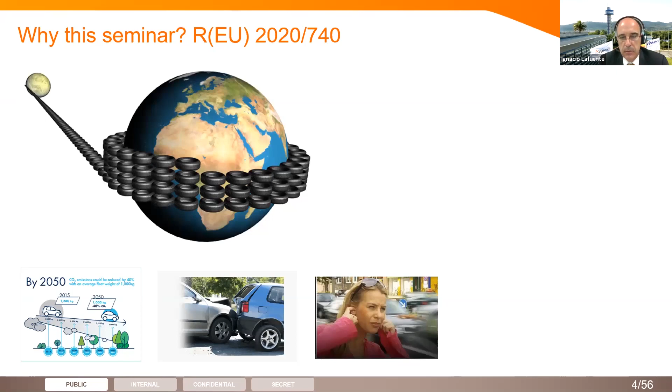Why this seminar? It's obvious that, all over the world, we produce more than 1 billion tires per year, probably near 2, and out of them, several hundred million go to the European Union. Tires have a significant impact on CO2 reduction, emissions, active safety, so avoiding accidents, as well as acoustic comfort of the citizens.

This is the reason why in the past, the European Union decided to add some regulation to the existing approval, and we established the initial tire labeling that later on, after 10 years experience, will be replaced by the new one, which is the matter of today's seminar.

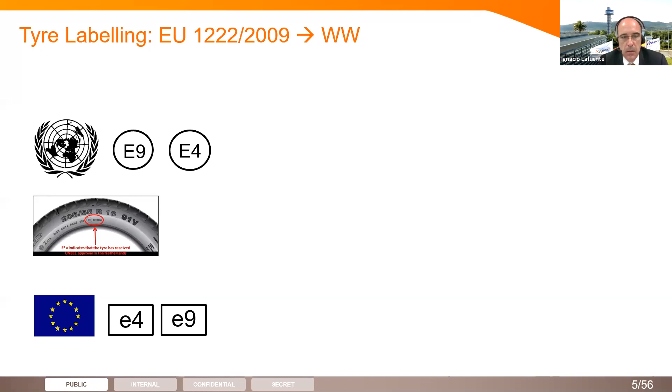Why a label? First of all, you remember that tyres were evaluated according to the homologation regulations during many years, but this has revealed to be not sufficient for consumers to make an informed purchase. Then the European Union decided to establish some kind of information to the end consumer so that when one person decides to replace the tires in the car, they have a little more information than the pure approval mark.

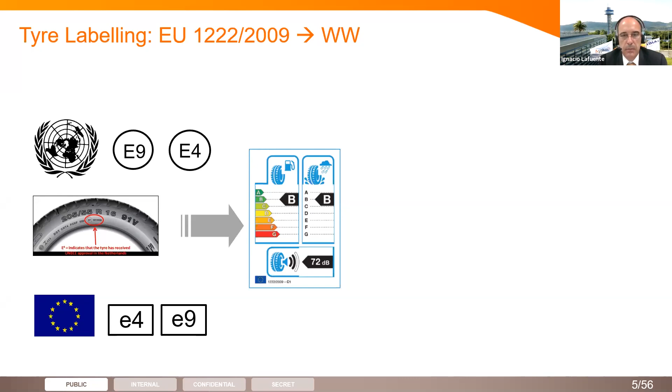This is the reason for the 1222 regulation in 2009 that has been a great success in Europe and as well has been the model for many other labeling schemes worldwide, Europe, Asia, America, etc.

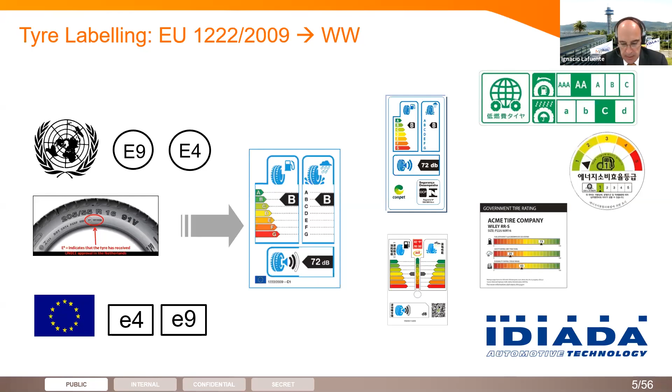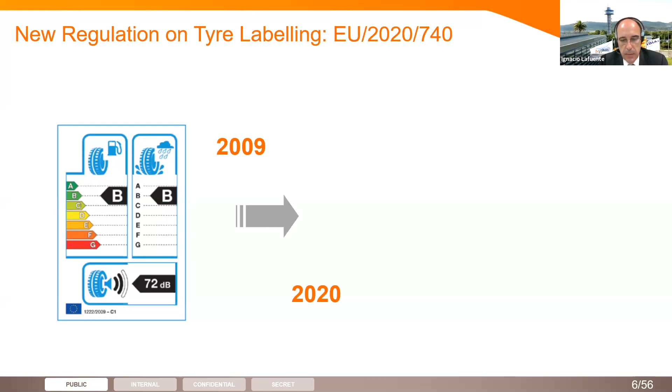Why this new regulation? After 10 years experience, we have seen the big benefits provided by the label. 10 years ago, we saw in the markets very bad labels in FGs, etc., as well as very high noise levels. As of today, the label has achieved important success by eliminating the worst segment of tires from the replacement market. Therefore, in the European Union, we see a clear benefit of that.

After those 10 years experience, we have seen that the label can be improved. And in this seminar, we will see the differences between the future label as of next year and the existing label today.

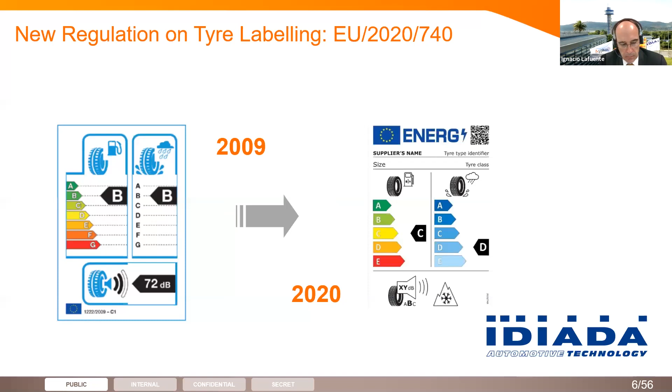Why do we organize this seminar? Who is IDIADA? IDIADA is a company providing engineering services to the automotive industry. First of all, we provide services of testing, development, engineering, and simulation.

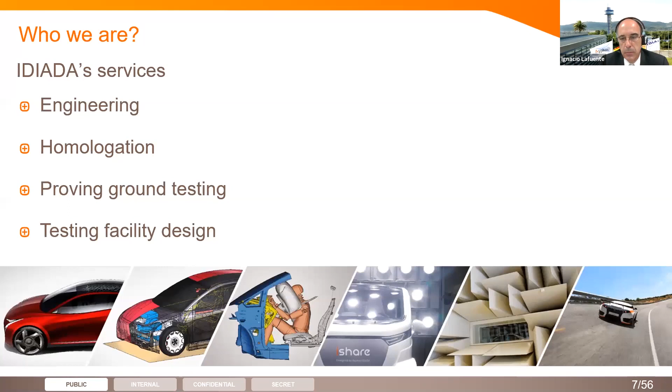But our homologation division, to whom we all belong, is a recognized technical service with full competencies in all the approval regulations, directives, and many non-European standards. As well, we have a complex of proving grounds, the main one at headquarters in Barcelona, as well as a newly opened proving ground complex in China.

IDIADA today is a multinational company with presence in more than 25 countries, with significant presence in European countries and Asian countries, as well as our American delegations. Today's seminar is foreseen for Europe and Asia, but it will be followed by another one at a timetable compatible with American attendees.

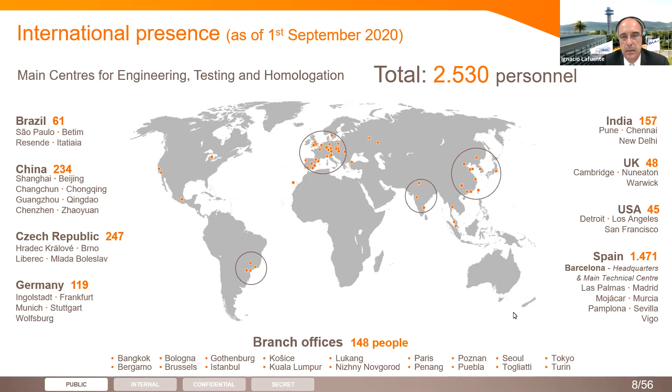What is the homologation division? First of all, the homologation division is the unit responsible in IDIADA for fulfilling regulatory requirements. We work for different approval authorities, for instance the Spanish government, as well as many other European or non-European authorities, helping manufacturers to prove their legal compliance.

Our work is based on UN regulations as well as European Union directives or regulations, but also based on national regulations when applicable. So we provide safety and security by signing approval certificates with good results, and with our approval certificates or reports, our clients, vehicle or component manufacturers, can get the necessary approval to sell the vehicles.

Our mission: to help manufacturers in their marketing activities so that with our documents, any kind of vehicle category or component can access any market worldwide, not only the European market, but any other, using our certificates.

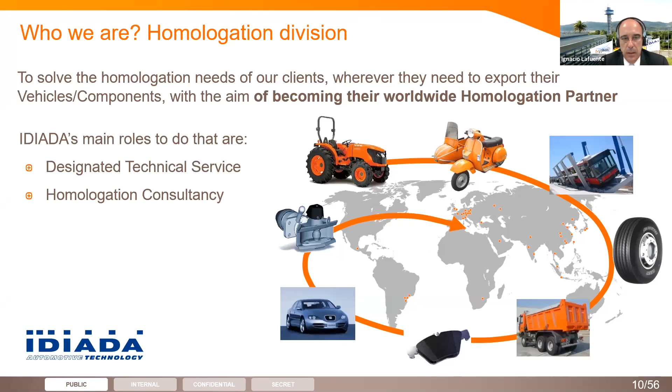Homologation division has an impressive network of international relations with different approval authorities, not only in Europe, so that we can help manufacturers in their activity marketing products in North America, South America, Asia, even African countries.

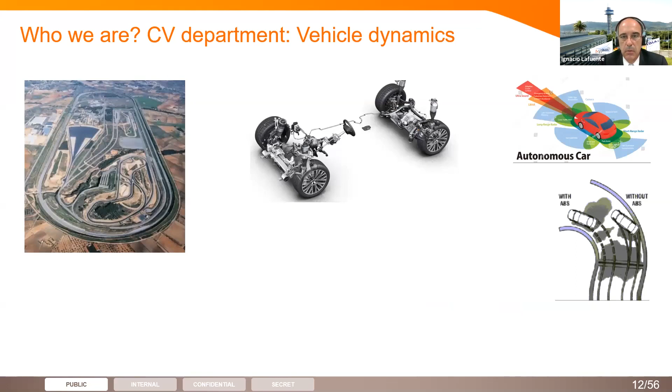In particular, this department, the commercial vehicle department, together with vehicle dynamics, is responsible for anything which is moving a car in the proving ground. So brakes, ABS, automated driving, stability control, as well as replacement parts or brake efficiency are our main responsibilities.

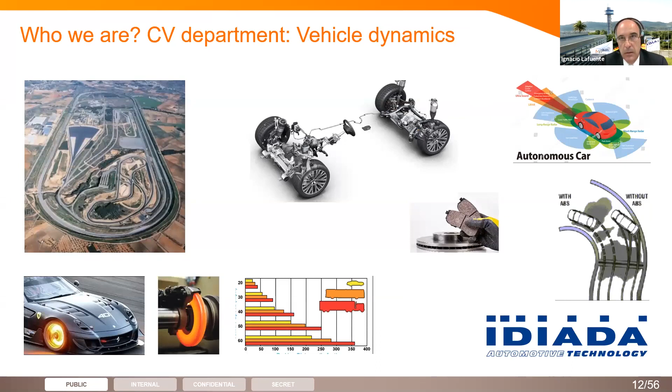Within this, tire testing and certification is a very important activity, and we are proud to be one of the few technical services having full capacity for tire homologation and tire labeling testing, because we have all the necessary facilities: ISO surface for noise, rolling resistance facilities, as well as impressive wet grip testing facilities for any kind of vehicle category, all together in our headquarters in Barcelona, as well as in the proving ground we have in China.

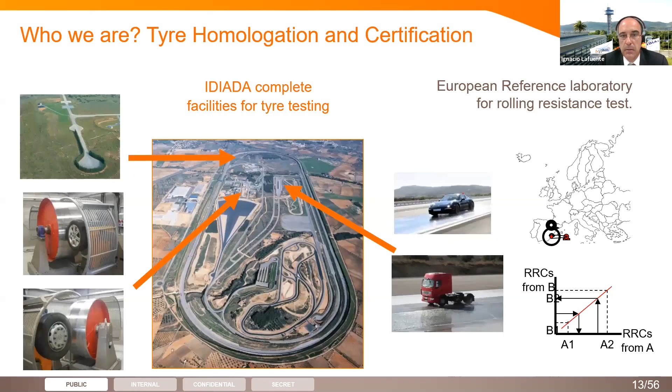We have these capabilities, and this, together with the fact of being one of the European reference laboratories for rolling resistance laboratory alignment. So this is an example of our capabilities.

Of course, you know that Spain is a warm country. We don't have snow. Therefore, for the snow testing, we have the nice cooperation of our friends in Finland as well, present here — one greeting for them. But indeed, IDIADA is able to perform all the necessary tests and provide all the possible services related to tire testing, including those like regulatory development or market control tests.

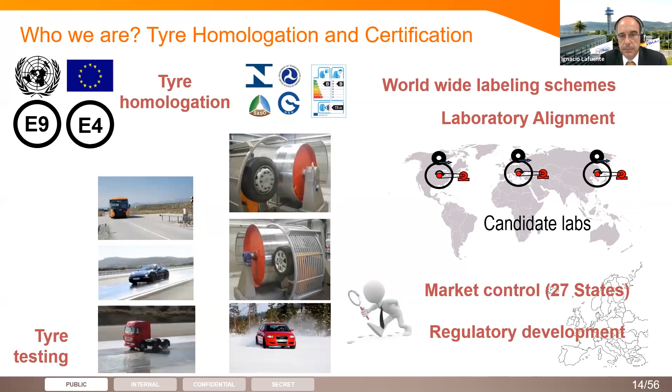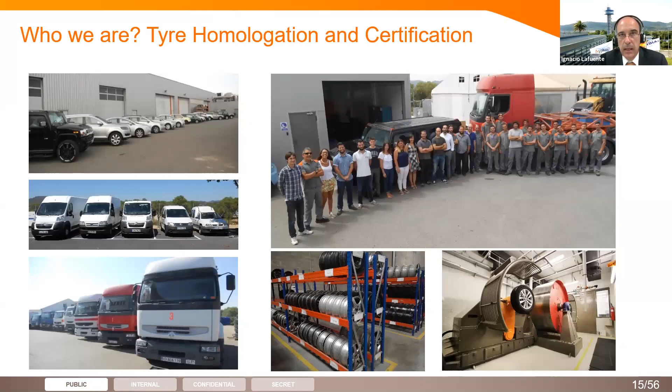To reach this target, we have created a strong structure of professional skilled teams. Probably the picture does not reflect the whole team, which is made out of more than 40 people, as well as an impressive fleet of testing cars and testing rims and wheels that allow us to test for approval or certification any tire dimension you can imagine in your catalog.

Out of those experts, please let me introduce the speakers that will present the whole seminar. First of all, Mr. Ricard Anadon, engineer, senior manager for tire testing and certification, as well as homologation. He is a member of the UNECE GRBP, the working group where tire regulations are developed, as well as a member of the European Commission expert group on laboratory alignment, EGLA.

Then we have Carmelo Cruz, senior engineer responsible for outdoor testing. He will explain anything related to wet grip testing and requirements.

Oscar Comajuan, senior engineer, is responsible for indoor testing, and he is also a member of expert group EGLA in laboratory alignment for rolling resistance. He will explain anything related to rolling resistance and laboratory alignment.

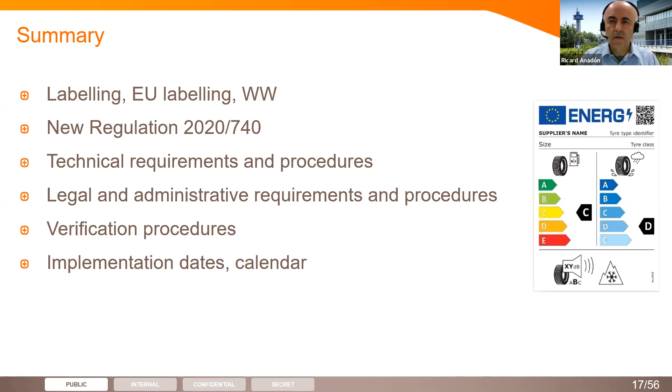As most of you probably know, the main requirements are performance parameters: rolling resistance, together with laboratory alignment — we will talk about this later — the wet grip performance of the tire, and the external rolling noise.

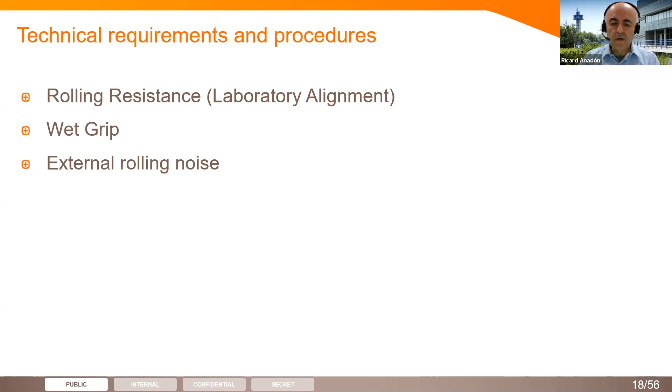Before continuing this presentation, I would like to say that IDIADA has a strong commitment to provide the best possible testing conditions to meet these requirements for the tire industry, in particular in terms of state-of-the-art proving ground, testing equipment, expertise, and even the optimum climate conditions we have in Spain.

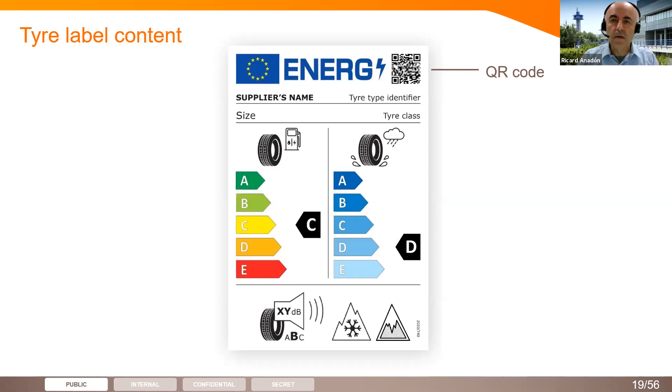Having said that, let's check carefully the label, the new label we have in this new regulation. As you can see, we will start on the top right corner. We have a quick response code, which will be linked to the European database. We will see this later.

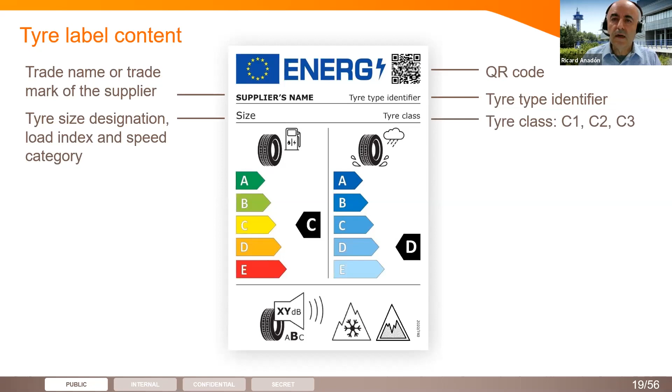On the left-hand side, we have the trade name or trademark of the supplier. On the right-hand side, we have a tire type identifier or commercial name of the tire. On the left-hand side, we have the tire size designation, including the load index and speed category. On the right-hand side, we have the tire class, whether it is a C1 passenger car tire, C2 light truck tire, or C3 truck and bus tire.

In the middle of the label, we have on the left-hand side the fuel efficiency performance class, organized from A to E. On the right-hand side, we have the wet grip performance class, also organized from A to E. And at the bottom, we have the external rolling noise class, including the sound emission value.

On the right-hand side, we have two new pictograms. One is the well-known alpine symbol, or three-peak mountain snowflake, if the tire is designed for snow, or the other new pictogram if the tire is designed for ice.

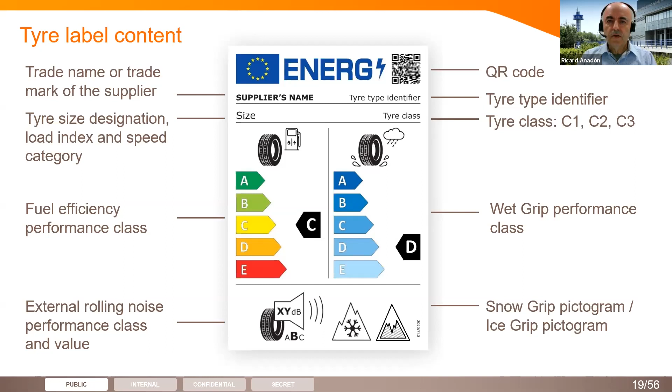Regarding the dimensions, these are exactly the same as the previous label. The overall dimension is 75 millimeters by 110 millimeters. All the details you will find in Annex 2.

And on the bottom, we have four options. The minimum information is the sound emission, sound level class, and the emission value. It could also be added the alpine symbol if the tire is for snow. Another option is if the tire is for ice, it could be this new pictogram, or both. Those are the four options on the bottom area of the label.

As Ignacio and Ricard introduced earlier, one of the tests performed in order to homologate and label tires is the rolling resistance test. Tire rolling resistance is a force caused by the constant tire deformation when rolling on the asphalt, which resists the motion of the vehicle, causing a direct loss of energy. This loss of energy is directly related to fuel consumption and CO2 emissions. The homologation and labeling regulations limit these energy consumptions on the tire, and they are checked through a rolling resistance test.

This test is based on ISO 28580, in which a tire is mounted on a test bench, like you see in this video, and pressed against a drum at a certain load, usually 80 or 85% of the load index of the tire, depending on the tire class, and run at 80 kilometers per hour.

There are four different methods of measuring these forces. The torque method, in which the torque in Newton meters applied by the electrical motor to the drum is measured. The force method, in which the force in the tire axle is directly measured. The power method, very similar to the torque method, but instead of measuring motor torque, we measure the electrical power in watts. And the deceleration method, in which the rolling resistance is calculated through the deceleration time, taking into account the moments of inertia on the drum and the tire and wheel assembly.

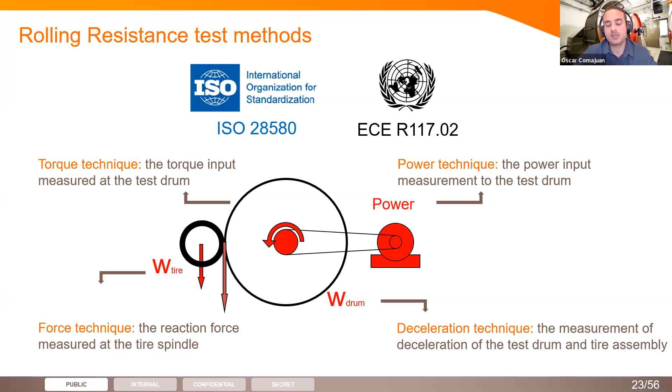The result obtained is a coefficient given in the dimensionless units of Newton per kilonewton, or the equivalent kilogram per ton.

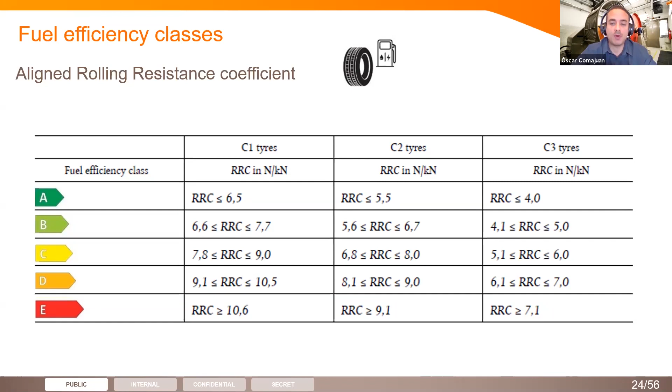The most important matter to remember is that these rolling resistance values are aligned values. So these are to be measured by a European reference machine or an aligned candidate machine, which has been correlated to a reference machine, which I will explain later in this presentation.

If we make a comparison between this table and the previous one shown in the previous regulation 1222 of 2009, we can see some differences. Basically, the table has been compressed, and for all tyre classes, values from A to C remain pretty much the same as in the previous regulation, whilst the maximum values now go up to E label instead of G, filling in the rows that were empty in the previous regulation, like D class for C1 and C2, and G class for C3. Also, maximum values have been modified.

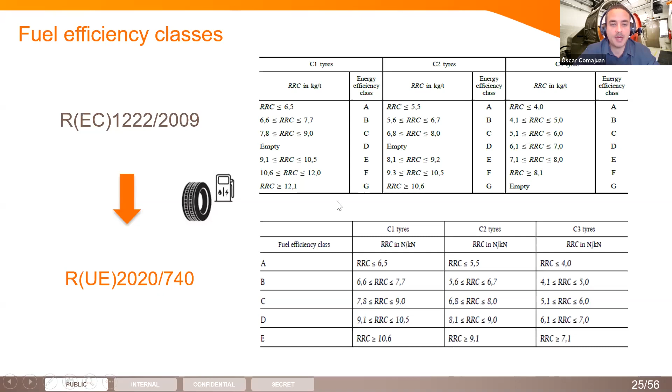As I was explaining before, these aligned values are according to the labeling regulation and can only be given in one of the reference machines of the European reference grid, or a candidate machine aligned to a reference one.

For those of you who are not familiar with these terms, I would like to explain why we need an alignment procedure. Basically, every machine has different components, and as I said earlier, they apply different methods of measuring this rolling resistance coefficient, like force, torque, power, or deceleration. That means that in the end, the results obtained may slightly vary between one machine and another.

So a way of making a machine give the same results as another machine is by performing an alignment between those two machines.

So what is an alignment? An alignment procedure between two machines consists of testing some samples in each machine under the same exact testing conditions, first in one machine and then in the other. Then both results are compared and a correlation formula between those two machines is calculated. This correlation formula, also known as an alignment equation, is applied to the result of the candidate machine, and then the result is corrected as if it had been tested in the reference machine.

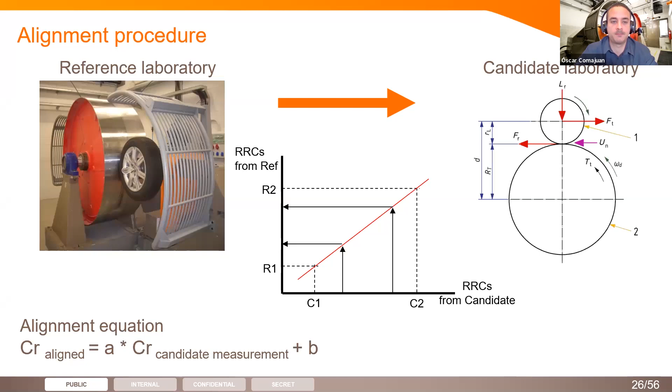This European alignment procedure was firstly introduced in Regulation 1235 of 2011, which was an amendment of European Regulation 1222 of 2009. The conditions to perform this alignment were set in Annex 4A of the 1235 of 2011, and now these conditions have been slightly modified and introduced in the new Annex 5 of the new regulation.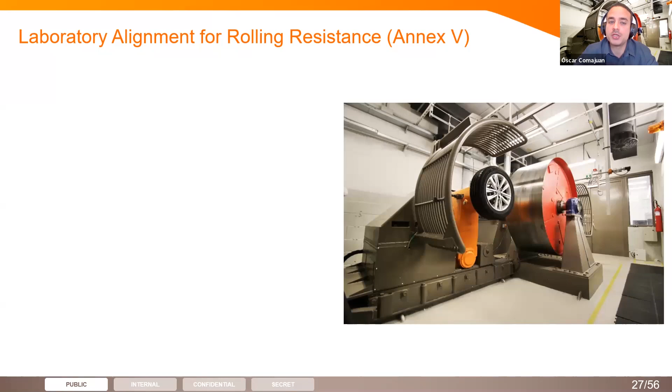The European alignment consists of a series of tests on at least 5 different tires, which shall be selected fulfilling certain requirements. There shall be a gap between the highest and lowest RRC values of 3 Newton per kilonewton in C1 and C2 tires, and a gap of at least 2 Newton per kilonewton in C3 tires. All these steps of rolling resistance coefficient between each tire shall be distributed evenly through the alignment set of tires selected, and the load index of the tires shall cover the range of tires to be tested in that particular machine.

In the previous regulation, there were also requirements on the maximum width and diameter of the tires, but now that has been deleted.

As requirements for the candidate machines or candidate laboratory, the standard deviation shall remain lower than 0.075 Newton per kilonewton for C1 and C2 tires and 0.06 Newton per kilonewton for C3 tires. Finally, the R2 correlation between the candidate and the reference machine, which basically represents how accurate the alignment formula is between both machines, shall be equal or higher than 0.97.

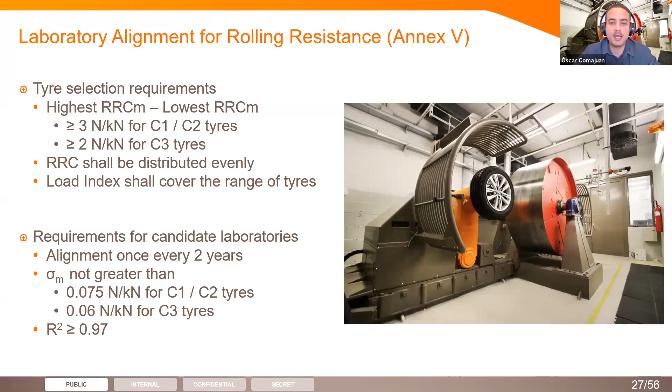Now I will give the floor to my colleague Carmelo, who will speak about the wet grip test.

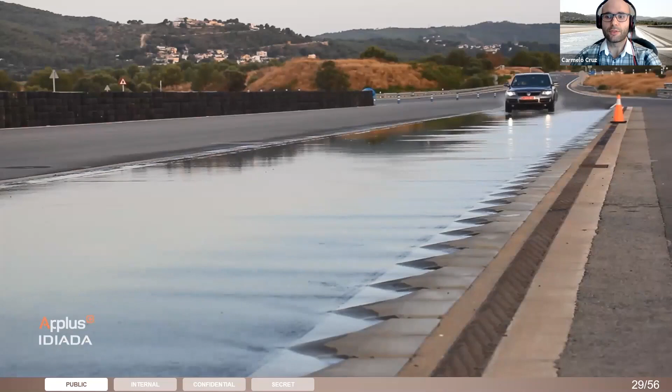The new Regulation 2020-740 does not include the test procedure as the old labeling did. Now it refers to the procedures of UN Regulation 117, so it will always be updated to its latest version. The test, as you can see now, consists of several brakings from 80 to 20 kilometers per hour. This test can be done using the vehicle or trailer procedure, which are completely equivalent.

The new wet grip method for car tires has been developed to improve repeatability and reproducibility. Some new parameters used in the final calculation are new. First, the test pressure now depends on the wheel load. Then, the texture depth is a correction factor in the final calculation. And the temperature ranges have changed and are more in line with the tire category, depending on whether they are normal, snow, or snow severe conditions tires.

For commercial vehicle tests, as you can see now in the video, the same procedure is used as in the old regulation. It stays the same. This procedure is shared for van, truck, and bus tires. It consists of several brakings from 60 to 20 kilometers per hour. Remember that car tires brake from 80, not 60. This procedure is also done with vehicle or trailer.

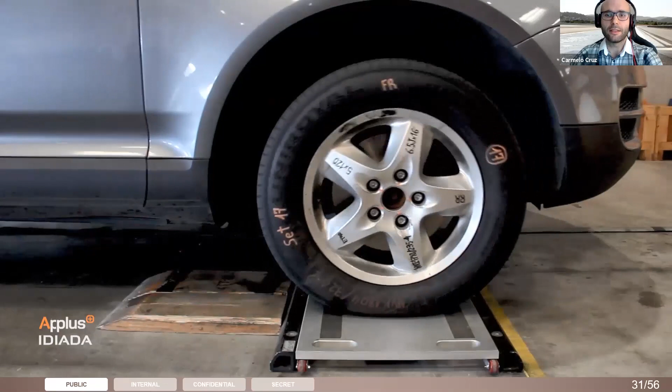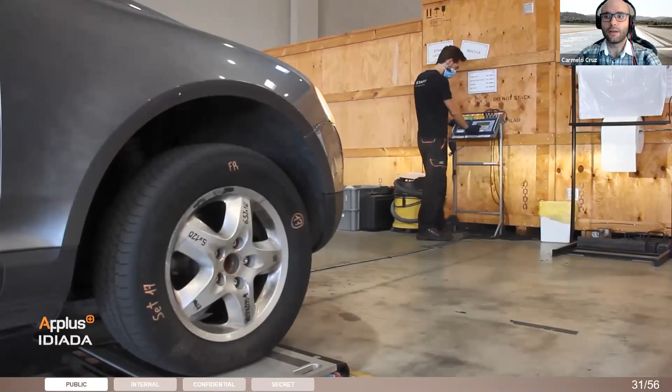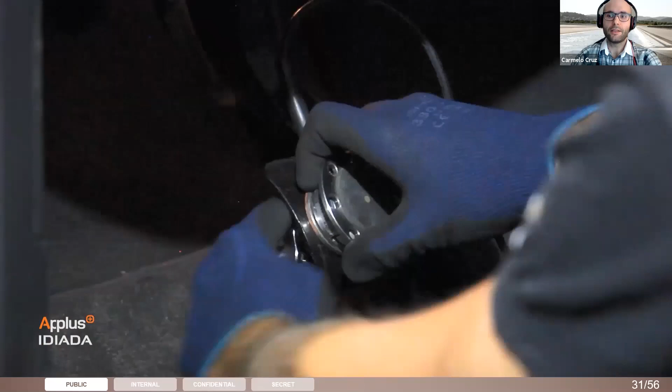Now in this video, you can see all the equipment used to perform a wet grip test. All these devices must be calibrated to ensure good traceability. The usage of a weight scale with 4 platforms is better for doing an online loading of the vehicle and seeing how the mass transfers from one axle to the other. Automatic test sheets are used also, and special pedals to measure the force applied, and also some human-shaped dummies to load the vehicle using water.

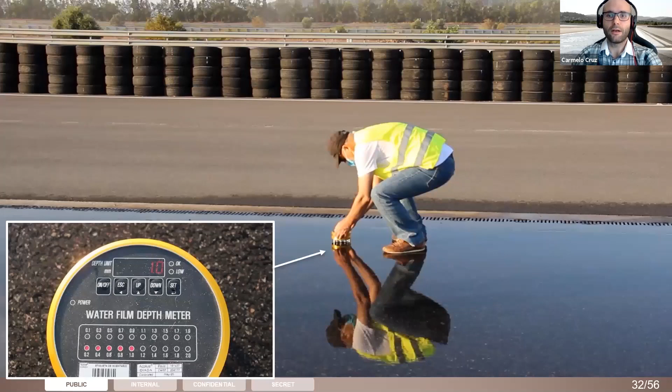The proving ground is maintained and measured by a specific department, but we have portable devices to do some checks also. You can see now the device to measure the water depth at the test location. The water depth is one of the most important parameters to control through the test. It's important to keep a constant film of water during the whole length of the track to provide repeatable results.

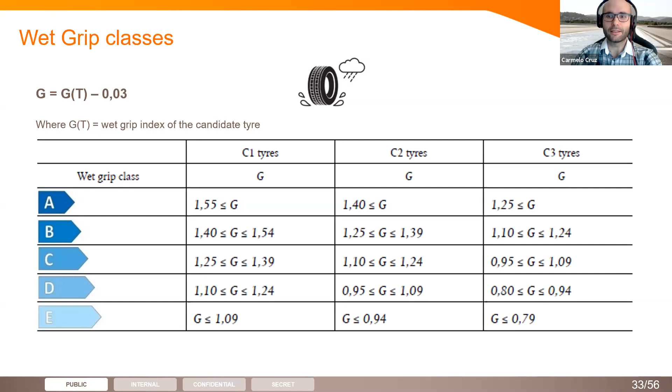This is the new classification for the wet grip grades. The top grades, from A to C, have not been modified. There were rumors about making it more difficult to get an A level, or about adding new grades like A+, but finally that was discarded. In fact, my company is sad about not having the A+ grade. The letter D is no longer empty, and grades F and G have been deleted from the chart.

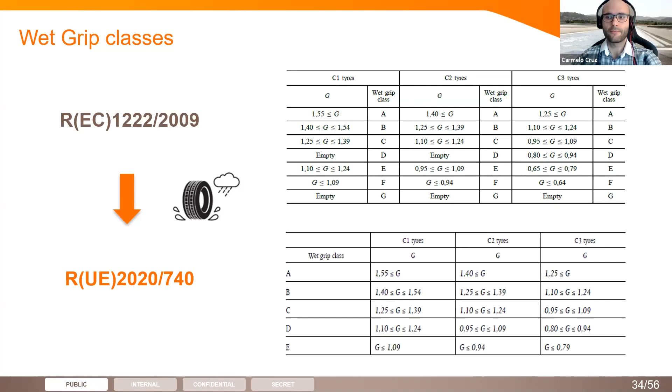Now it's clearer and simpler to identify which is the correct grade for a given test result. And after having explained this, I'll give the floor to my colleague Nuria, and she will explain the noise test.

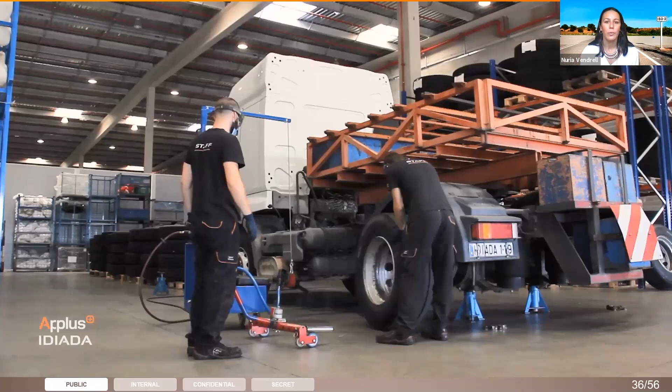First of all, we want to show you how we prepare and perform the test, just to provide you with some background before the specific technical information.

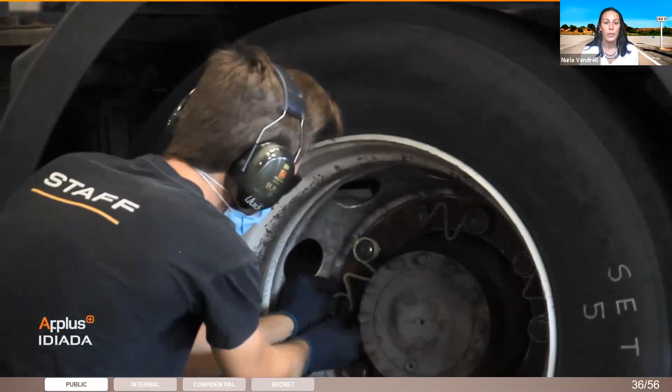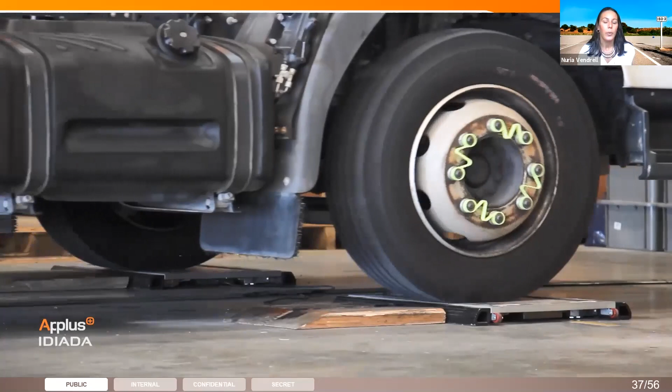As Ignacio said at the beginning, the noise test is an outdoor test. So the first thing we need to do is prepare the vehicles and fit the tires with their correct rims. In order to perform the test according to the regulation, following the tire size we're going to test, we also have to load the vehicles and set the pressures according to this load.

Once the vehicle is prepared and the tires are running, we are ready to perform the test on our ISO test track. This test surface must comply with the ISO 10844-2014 requirements, which is much more restrictive than the previous one. And two of the most important parameters of this surface are the absorption and the texture.

To perform the test, the vehicle has to pass between the two sound level meters with the engine off, at different speeds equally spaced under and over the range. For C3 tires, the average speed is 70 kilometers per hour, and for C1, C2 tires, the average speed is 80 kilometers per hour. When the vehicle is right in the middle between the two sound level meters, the noise emitted by the tires is recorded, and after some calculations, we get the final result. And it is with this final result that we can label our tires.

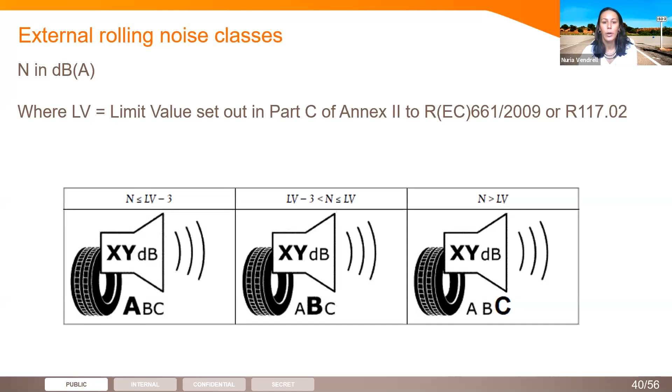Here we can see the new way to label tires regarding noise. Instead of 1 arc, 2 arcs, or 3 arcs, we now have A, B, or C. For example, if your final result is lower than the limit value minus 3, you will have an A. If your final result is between the limit value minus 3 and the limit value, you will have a B. And if your final result is higher than the limit value, you will have a C. The limit value in decibels must also appear on the label.

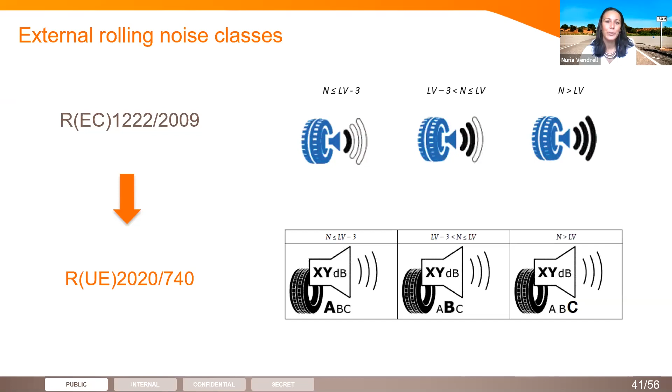Thanks, Nuria. Hello again. The fact is that new market trends are moving toward more common usage of all-season and snow tires. Some countries are forcing their usage during winter, and others are just recommending it. But the truth is that every day more and more snow tires are bought. The problem is that snow tires are not usually as good as normal or summer tires when considering wet grip. This fact made snow tires have a worse label than normal tires in front of the final consumer.

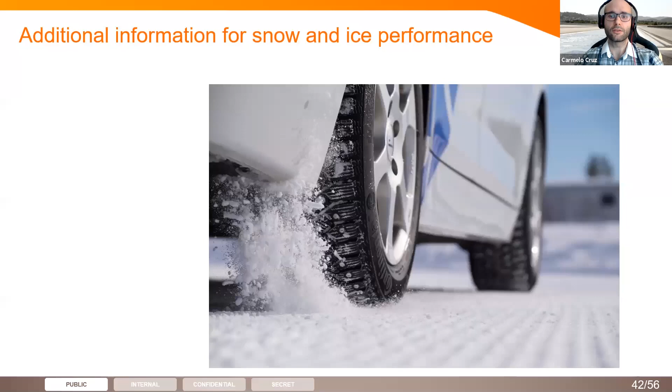The snow grip test is very similar to the wet grip test. For C1 and C2 tires, it's a braking test, very similar to the asphalt wet grip test. For C3 tires, it's an acceleration test. But the principle is the same, whether you brake or accelerate, you are comparing with an SRTT. It's also a comparative test, needing 2 runs to do the average.

Snow tires have blocks set far apart, designed to grab and scratch the snow, so the performance is not as optimized on wet asphalt. So the inclusion of the symbol will allow the final client to choose the correct tire, not only focusing on the wet grip result when thinking about their safety.

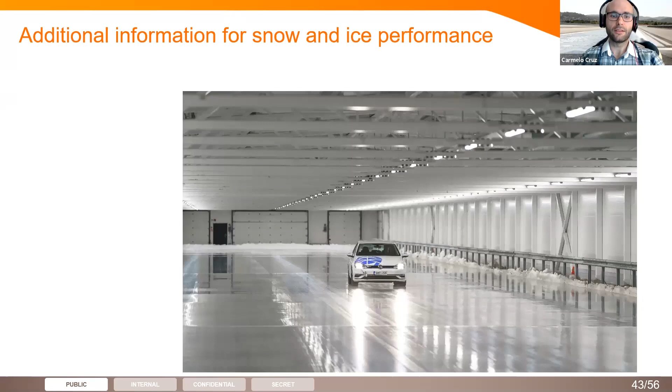This is the very brand new test included in the new regulation. The ice grip test is also based on a braking test. This test comes from the ISO 19447, still in a draft state. It needs 3 runs to do the average.

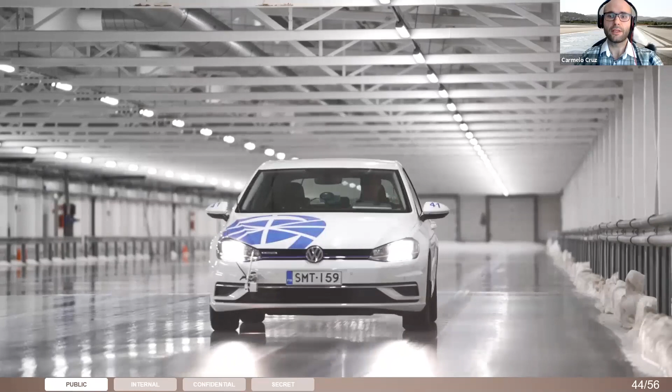Ice tires are not usually good at wet grip, nor at snow, so it's important to show the client the purpose of these tires. They have blocks set very close together, made of a special compound with a mix of silica, staying flexible in very cold temperatures. These tires are perfect to drive not only on icy surfaces, but also on highways during very cold seasons.

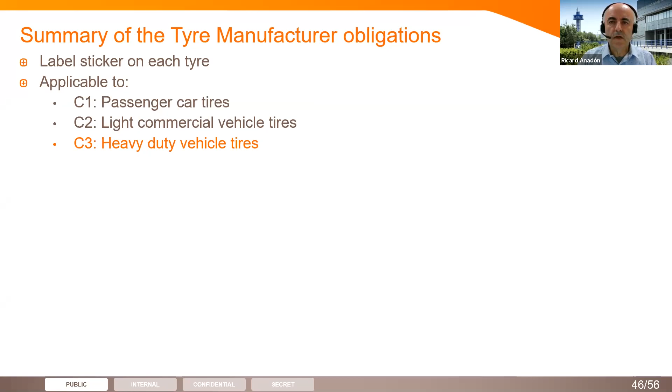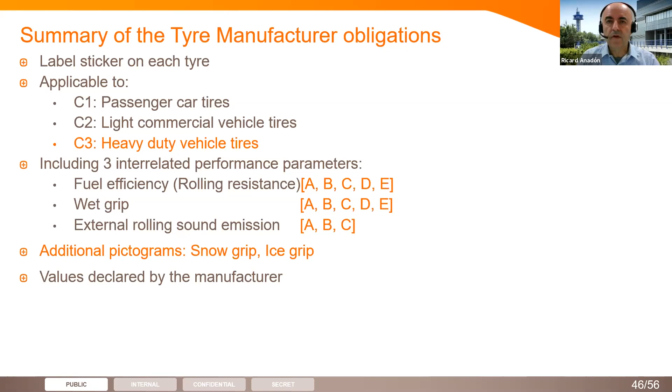Also, as you have seen, this label is including 3 interrelated performance parameters. Fuel efficiency measured by rolling resistance, classes from A to E, wet grip, classes from A to E, and external rolling noise or sound emission, classes from A to C. Additionally, we have 2 new pictograms, whether the tire is designed for snow or for ice. The values are still declared by the manufacturer. Of course, if the test is performed in an independent laboratory, it's adding value, but at the end, the manufacturer is deciding which values should be declared in the label.

A new point, as we have seen, is a quick response code linked to the public database. We will see later. Also, a new point in this regulation is that the label information should be available for vehicles, for OEMs. So in other words, this regulation is not applicable only to aftermarket, but also to original equipment. And it is a vehicle manufacturer responsibility to show information regarding the tire label to the buyer. And finally, the label information should be available on any promotional material and internet, and this information should be close to the price.

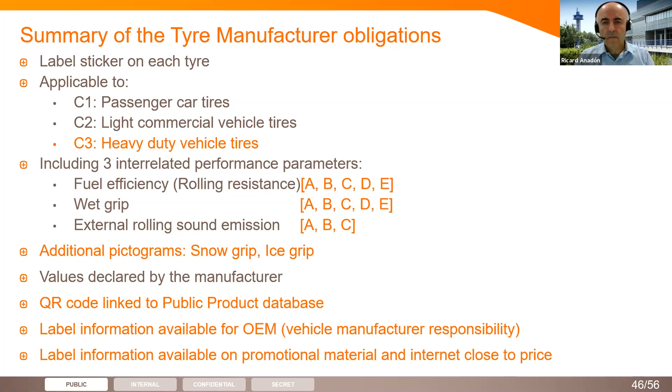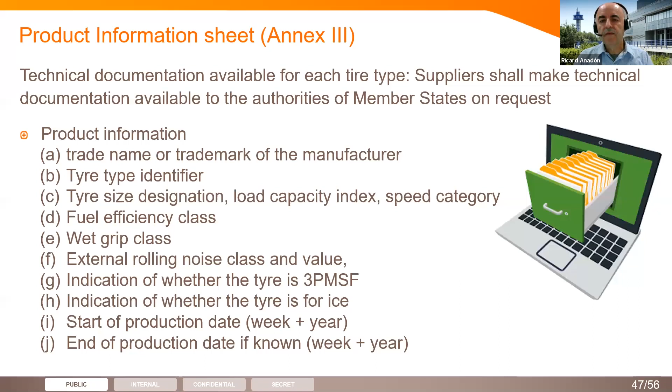Furthermore, there should be a product information sheet available for the authorities. This information sheet is very similar to the information document provided for getting Regulation 117 type approval, for example. And this document should include information such as trade name or trademark of the manufacturer, tire type identifier, tire size designation, including load index and speed category, all the information on the label, fuel efficiency class, wet grip class, external rolling noise class, whether the tire is designed for snow or for ice, the start of production date in a 4-digit format, so week and year, and the end of production date if it is known. Okay.

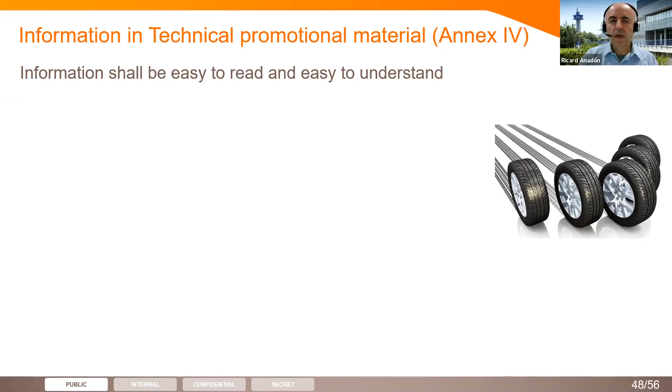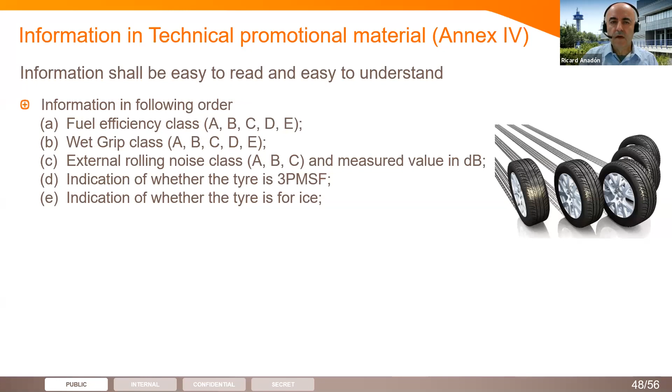Also, the label information will have to be included in any promotional material. First of all, this information shall be easy to read and easy to understand. It should be organized in the following order: fuel efficiency class, wet grip class, external rolling noise class, and indication of whether the tire is for snow or ice. Furthermore, the manufacturer shall also make available information regarding whether the tire belongs to a family, so indication of a range of lowest and highest performance.

A link to the Commission website where the end user can find more information. Clear explanation of the meaning of the pictograms on the label, and some kind of a statement highlighting the importance of the driver behavior, such as fuel saving, tire pressure check, or respect to stopping distance. Okay.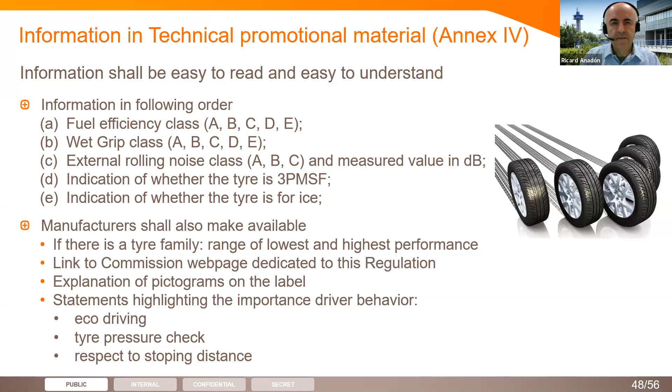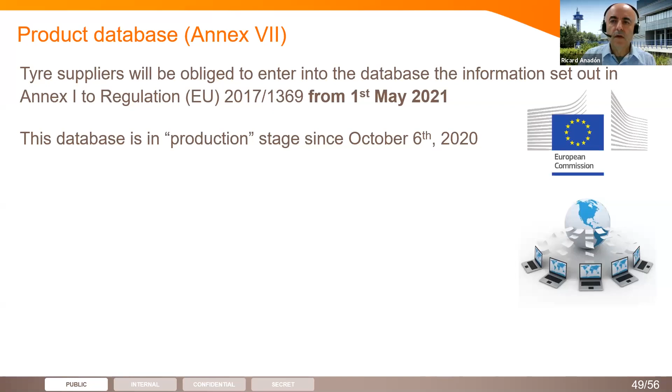Also, another important point is that the tire manufacturer shall introduce information regarding the tire in a European database. This database is already existing in the European Union for many other products, a total of 23 products, and now tires are included in that database. The database is called EPREL, European Product Database for Energy Labeling. And this database, after a phase of development, is now in production stage since October 6th, so last month. Okay, so it's ready to upload information there. There are two parts of it.

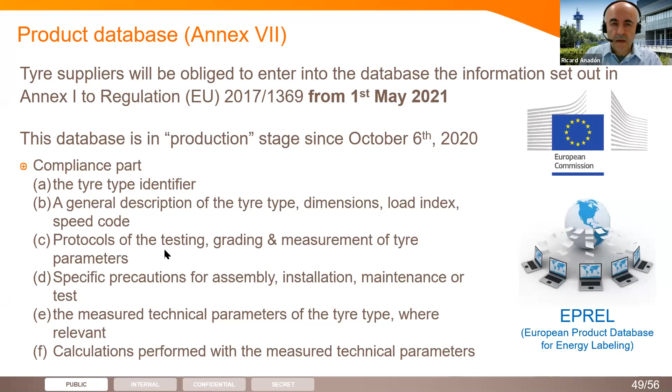One part is called the compliance part and is accessible only to the European Commission and the authorities, market surveillance authorities. And the information there should be the tire type identifier, general description of the tire type, dimensions, load index, the speed code, protocols of the testing, grading and measurement of tire parameters, any specific precaution for assembly, installation, maintenance, or test, measured technical parameters of the tire type where relevant, and calculations performed with the measured technical parameters. Okay.

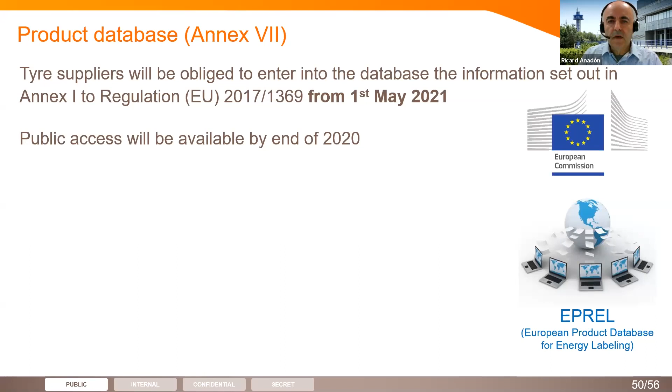Also, there will be a public part of it. So part of this information will be available for all users in the European Union. This public access will be available by end of 2020, so not yet. And information there should be the trade name, trademark, address, contact details, or other legal identification of the supplier, the tire type identifier, the tire label information in electronic format, the classes and other parameters of the label, and the parameters of the product information sheet, the PIS, in electronic format.

So in other words, if you remember, we spoke about the QR code. Anyone with a mobile phone or any portable device will be able to scan this code, and this code will be linked to this part of the public database to have all the information of the tire. Okay.

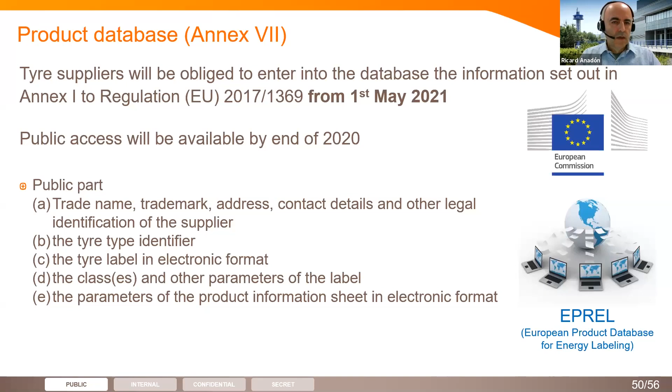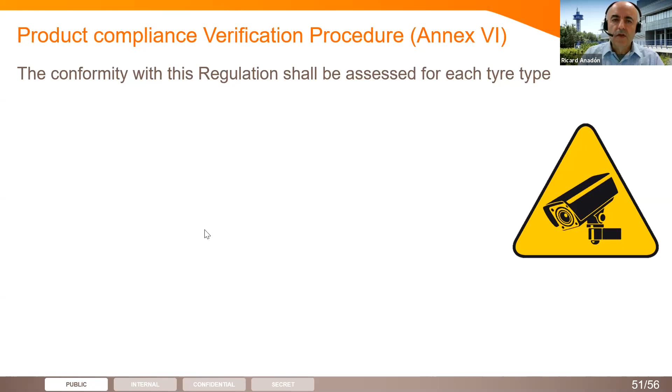Also, another very important point of this regulation, described in Annex 6, is the conformity of this regulation. This regulation is pushing European member states to perform market surveillance activities or market surveillance control. This control is just to make sure that the label is according to the real performance of the tire. Then this table will be used as tolerance to define the conformance.

For example, in terms of rolling resistance, the product will be declared conform if the aligned value is not more than 0.3 N/kN over the upper limit of the declared class. Aligned value, remember. In terms of rolling noise, for example, the measured value shall not be greater than 1 dB from the declared value. In terms of wet grip, the measured value shall not be lower than the lower limit of the declared class.

Similar for snow grip, the snow grip index shall not be lower than the minimum required value in Regulation 117, where this snow performance test method is defined. And regarding ice grip index, it shall not be lower than the minimum value identified in ISO 19447. So if some tires are found non-conformant, then the authorities will contact the manufacturer to start the procedure.

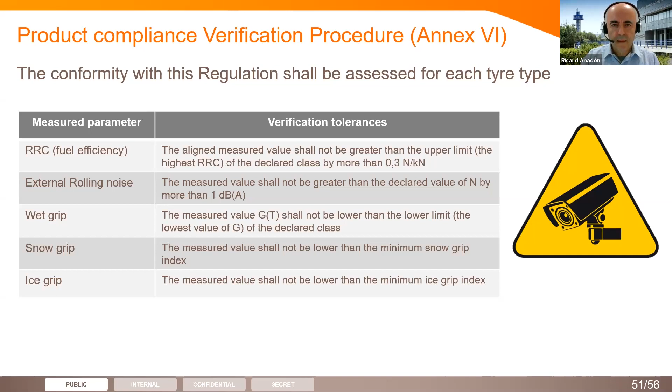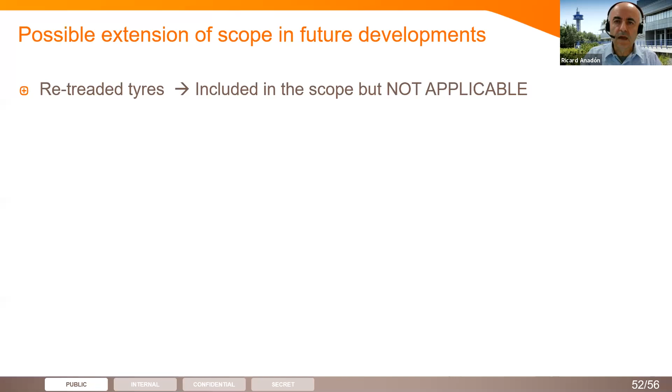Furthermore, this regulation has possible extensions in the future. For example, for retreaded tires. The retreaded tires are included in the scope of this regulation, but the label is not applicable until we have suitable test methods for all performance parameters. Similar to that, mileage information could be included in the future, but is not included yet because there is no test method available in Europe. And similarly, abrasion information is not included, but it could be included in the future if we can define a suitable test method.

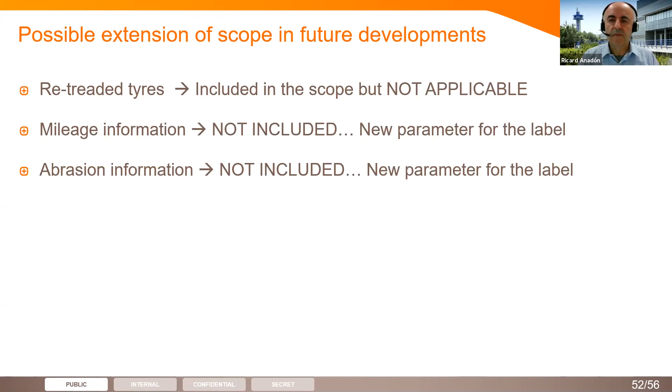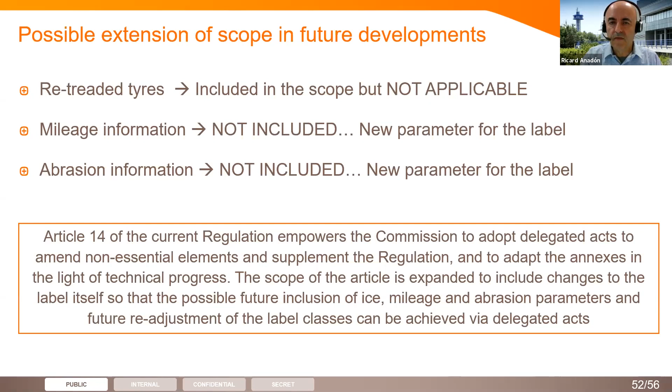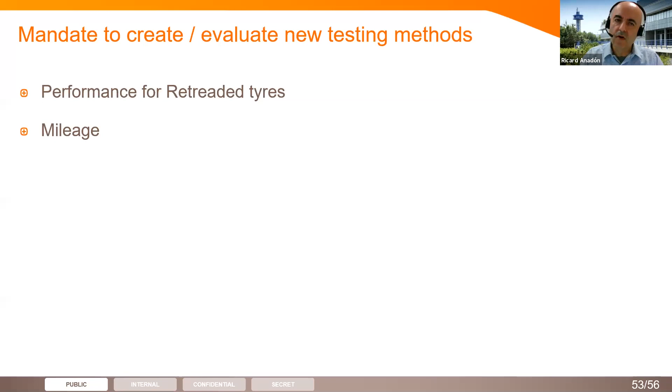All of this is possible thanks to Article 14 of this regulation, which empowers the Commission to adopt delegated acts to amend non-essential elements of this regulation without touching the main text of the regulation. Therefore, there is a mandate to create and evaluate test methods for performance of retreaded tires. As we said, mileage: there are some testing methods in the US and other markets, but not in Europe yet. And abrasion also.

And finally, the European Commission is committed to carry out an evaluation of this regulation by 1st of June 2025, to see if this regulation needs further amendments or further improvement, including the consumer survey.

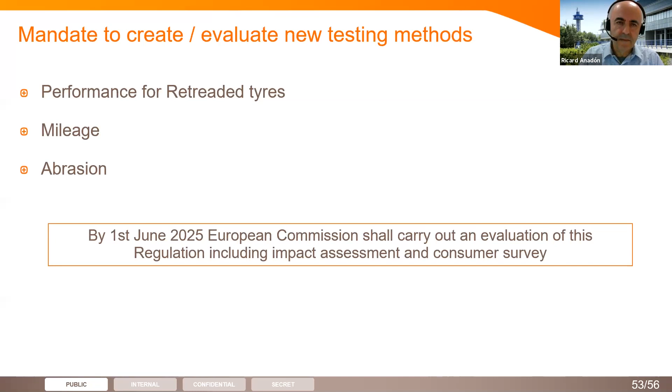Finally, I would like to go through relevant dates of this regulation. First of all, this regulation was published 5th of June 2020. It will enter into force the 1st of May 2021. This is the main date. And regarding the product database, any product placed on the market after 1st of May 2021 should be according to this regulation, and therefore the information should be introduced in the database. But for tires produced between 25th June 2020 and 30th of April 2021, there is a transitional provision to enter the data before 30th of November 2021.